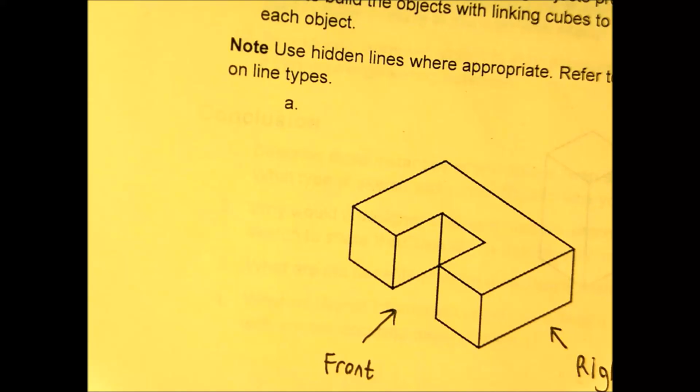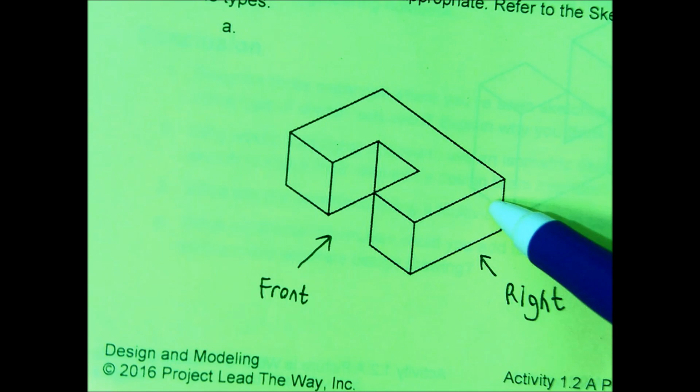We're seeing an isometric sketch of our figure that we're going to be creating. Okay, I'm actually going to have you draw this figure on your isometric graphing paper first, so you can get some practice drawing isometric sketches. Then from there, you're going to take your isometric sketch, and I'm going to show you how to turn your isometric sketch into a multi-view sketch.

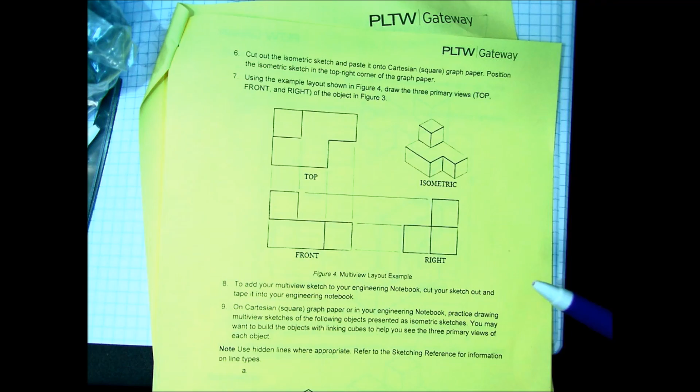Okay, what a multi-view sketch does is it allows a 3D figure to be represented from 3 different surfaces, from 3 different directions: a top view, a front view, and a view from the right side. All right, so from the front, from the right, and from the top of the figure. And that allows engineers to see how a 3-dimensional object looks and have the dimensional components added to it as well. That way the figure can be easily fabricated or manufactured.

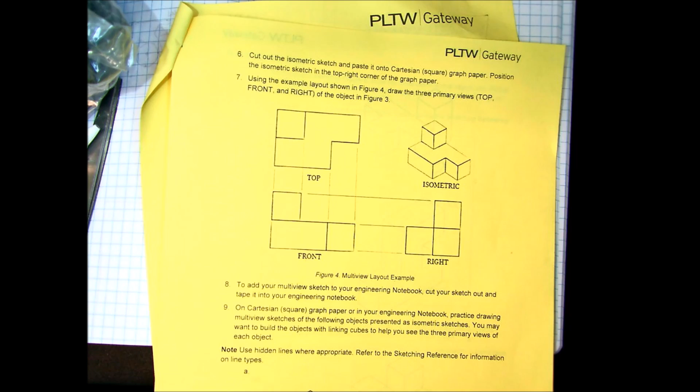Okay? So this figure right here, we're going to go ahead and create it as an isometric figure first. It is made of 5 different cubes. You can kind of see them 1, 2, 3, 4, and 5 here. So if you need to get some linking cubes to create this figure, feel free to get some. Alright, so I just created the figure real quick so I have something to look at, and remember to ignore the little nub that comes off on the end. Okay, so that's what my figure will look like.

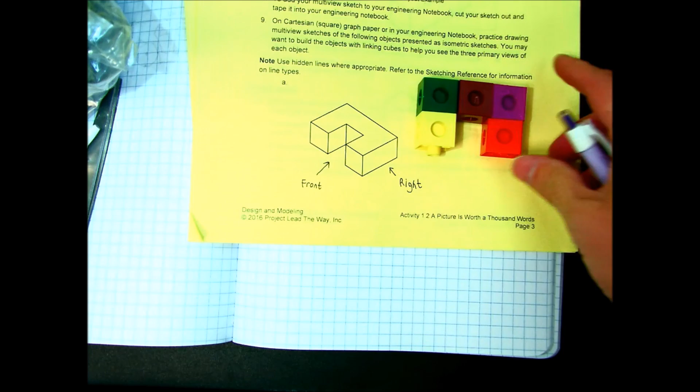Alright, we're going to go ahead and sketch this thing first. We're going to assume, so that our sketch doesn't end up being super large, that each square is 3 by 3 by 3 in depth. Okay, so when I sketch it, 3 spaces. So I'm going to start right here at the bottom corner. Alright, I like to select a corner usually. Okay, I'm going to start going off to the left here to this point, so that's 3 spaces.

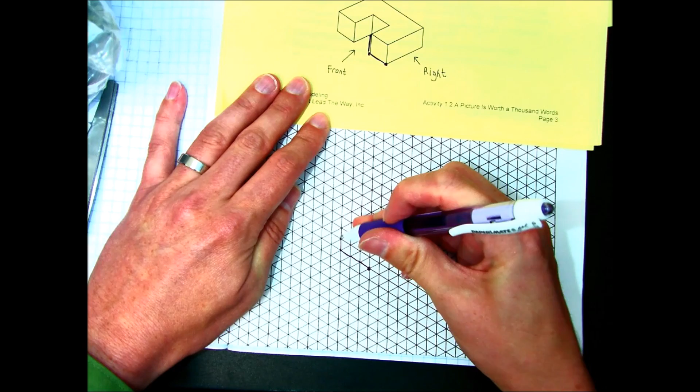1, 2, 3. Okay, then from here I'm going to go up to here to this point, so that's 3 spaces. 1, 2, 3. Then I'm going to go over 3. 1, 2, 3, and then down 3. Okay, and I'm going to darken my lines just so it's easier for you all to see them. Okay, and that gives me this surface right here drawn. Now, from my initial point, I'm going to go across to this point. Okay, and that is 2 cubes worth, so that would be 6 spaces. So 1, 2, 3, 4, 5, 6.

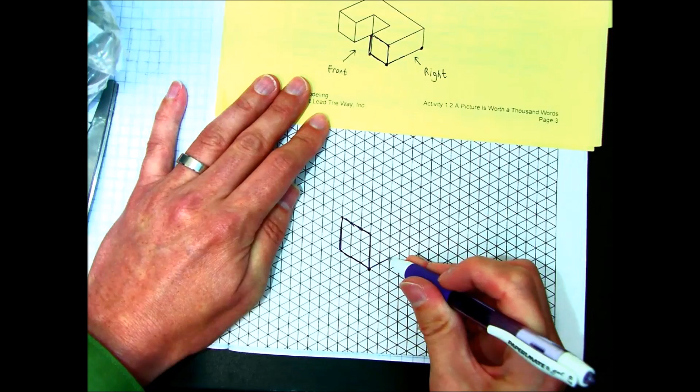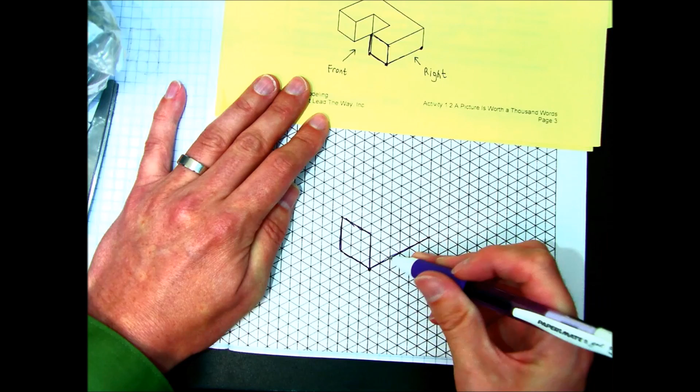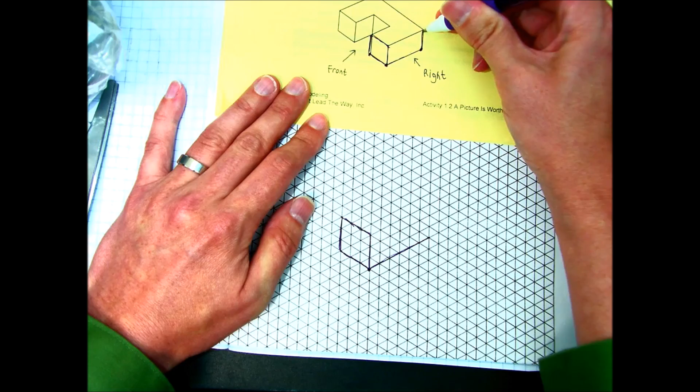Remember, we're dealing with square objects, so you shouldn't actually be coming off of your isometric spaces at all. If you find that you leave any of these grid spaces, you've made a mistake somewhere, since all these figures are rectangular or square in shape since they're put together. Okay, so I can go up here, and it's 1 cube worth, so that's 3 spaces. 1, 2, 3. All right, and then from there I can come across, and you see I'm systematically going through my drawing and making sure that I'm not making any mistakes.

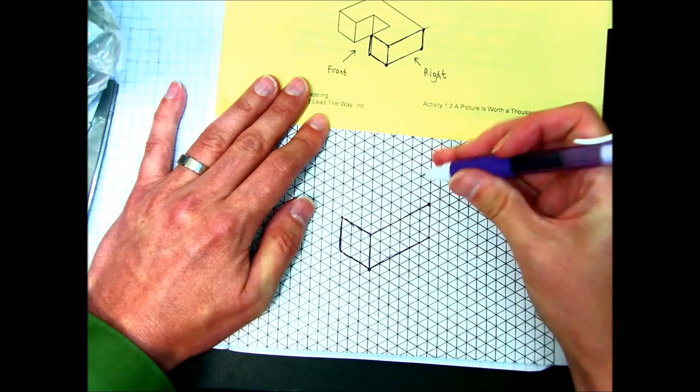So now I've got 1, 2, 3 cubes here, my physical figure, so that would be 3, 6, 9 across. From this point I'm going to go across 9 spaces. 1, 2, 3, 4, 5, 6, 7, 8, 9. Alright, and then from there, coming across here, which is 2, so that's 6 spaces. 1, 2, 3, 4, 5, 6. Okay, then from here to here is 3, so 1, 2, 3. Alright, same angle as I'm seeing in the drawing. Okay, from here I can come down 3. 1, 2, 3.

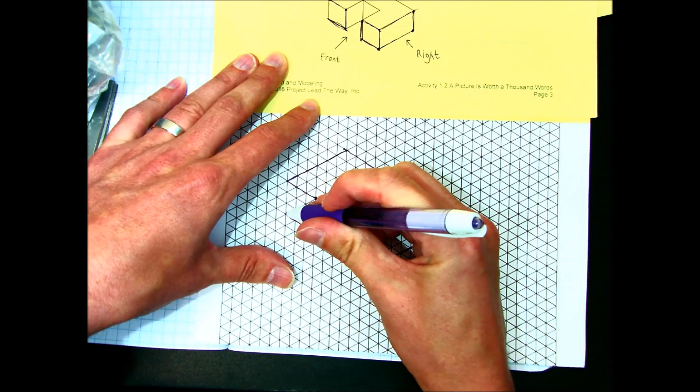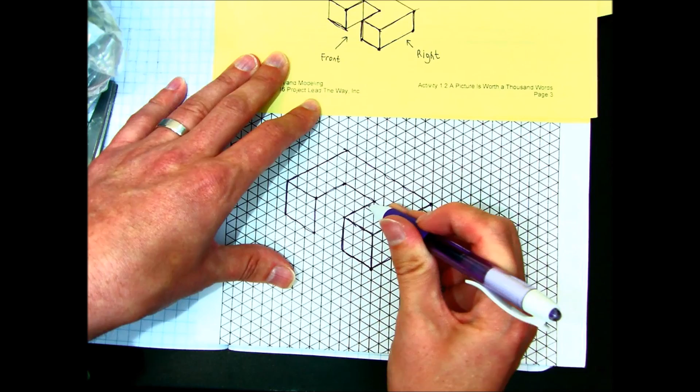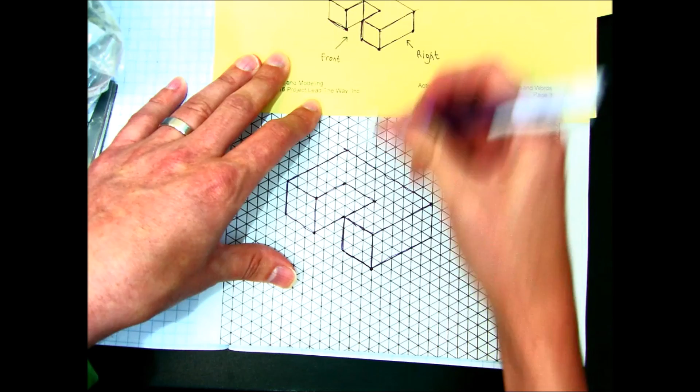Then across here is 3. 1, 2, 3. And then up here is 3 as well. Alright, so now I need to continue from here. I'm going to go over 3. 1, 2, 3. Down and over 3. 1, 2, 3. And then back across to the point I was at before. 1, 2, 3. Okay. And now I still have these 2 lines to do as well. So that's this point here, this corresponding one. 1, 2, 3. And then up here to here is 1, 2, 3. Okay, and that is my isometric drawing of my figure. Okay, I'm now going to cut this out so that I can put it in my engineering